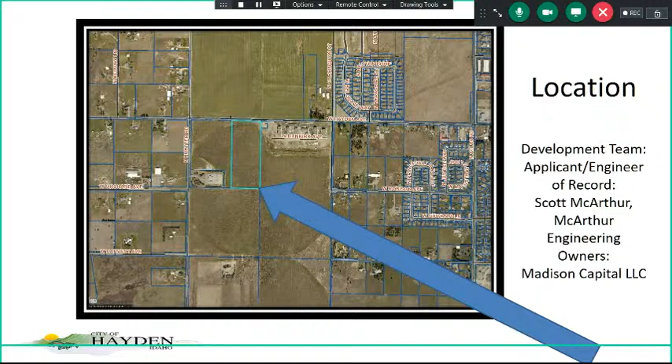The applicant and engineer of record is Scott McArthur, who's in the audience from McArthur Engineering. The owners are Madison Capital LLC, and we have Scott Kurtz, and Kiefer is on the phone. They're both here to represent their requests.

So I just want to lay a land before they take the stage. Hey, Keith Gibson has just arrived, make the record known.

Currently, the existing zoning for this location has about 300 feet south of Hayden Avenue that is zoned commercial, and the remainder of the property is zoned residential single family. The future land use map shows about 600 feet plus or minus as being mixed use, and the remainder of the property being mixed residential.

Their request is to change the commercially zoned property to mixed use, not do anything with the residential single-family zoned property. So it's a portion of what shows on the future land use map, and none of the residential is moving to anything. Just wanted to clarify that, since that question had been raised.

In your staff reviews, when we talked in the subdivision staff review, it was identified that in 2013, this property was annexed, and in that annexation there was a restriction to 4 dwelling units per acre. So if you take the 18 plus or minus acres of this project site and multiply by 4, you get 72 dwelling units.

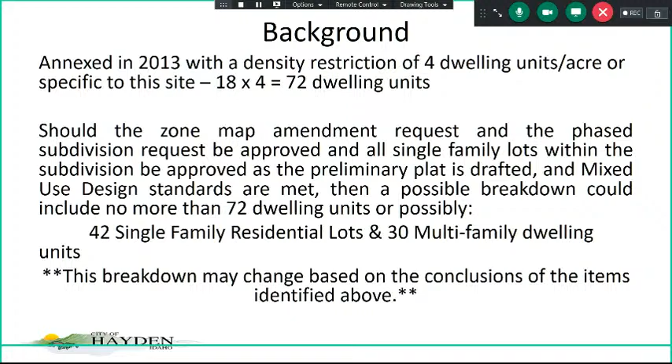no more than 72 dwelling units, or possibly 42 single-family residential lots and 30 multifamily dwelling units on that mixed-use, if it's approved, parcel. There's a lot of ifs and catches and possibles in there, but that gives you somewhat of a scenario. So that breakdown may change based on the conclusions of the items identified above. So in a perfect storm, that's kind of what could happen.

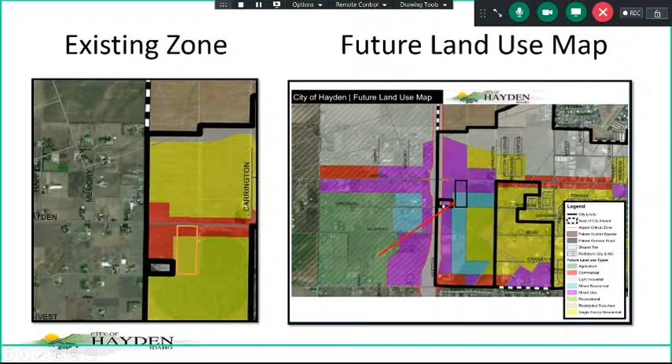So the zone map amendment, again, that's the 46 number, is a request for the commercial along Hayden Avenue to migrate toward mixed use, with the remainder of the property to remain single-family residential. In this particular instance, that mixed use is part of that geographic location that abuts Hutter in the future land use map. So as such, it would have a mixed use designation of MU2.

And as the applicant has requested for this lot to be used for both commercial and multifamily, that MU2 designation of that subcategory requires that a zoning development agreement be entered into in relationship to how that piece of property is developed. Keeping in mind that the total residential density for this whole site, this whole 18-acre piece of property, can only be 4 dwelling units per acre. Okay? Just kind of lots of pieces moving in that. Wanted to get that kind of cleared out.

And then the second public hearing piece is that subdivision that goes with Project 76. It was identified in a staff review that they're a part of or just finished up a boundary line adjustment with the property to the west. It's a phased subdivision request, and that's based on sewer basin lines predominantly. The mixed-use site is proposed to include both commercial and multifamily should the request for that zone map amendment be approved. Otherwise, it's commercial development.

And this looks like a 42-lot residential single-family phased based on the availability with that one lot to the north. And there is a comment in here about the applicant requesting sewer basin transfer. So in your application, we showed you a preliminary plat or a proposed plat. This was what was in your staff review. It shows this area kind of grayed in as being phase 2, mostly in H8 sewer basin, and this area as being phase 1.

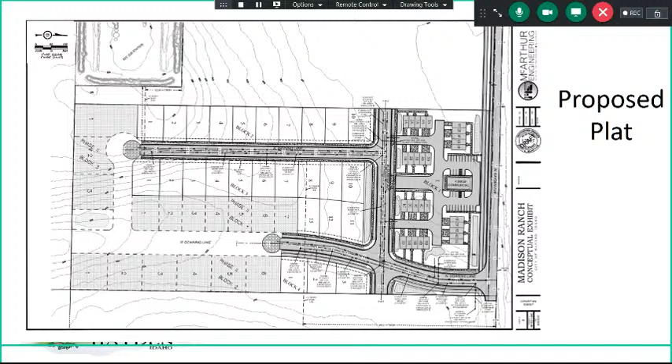This is a site plan, and it's there for pretty much conceptual purposes only to show how you could potentially meet the 10% required ground floor commercial that's required on this property, meeting those mixed-use design standards, and or how you could get some multifamily units on there. This is not a site plan review, keep that in mind, but it is conceptual to show how it could kind of lay out the land, all right? So with that, that's really the kind of general background, kind of laying the path.

I'm going to turn it over to Scott. Which one of these do you want up first? This one? Next one, no. This one? Thank you. Okay. I'm going to go sit back over there for a while. Probably take you a little while. By the way, for those of you that aren't aware, Rob Wright's our city engineer. Alan Soderling's our public works director. If you have questions, any of this I can answer.

Good evening, Commission. Scott McArthur, McArthur Engineering, P.O. Box 2488, Post Falls, Idaho 83877. Here tonight to present the Madison Ranch project. As Donna said, it's a little bit interwoven subdivision zone change. It's always hard to follow Donna, and I mean that in total sincerity because she goes through every bit of it, and she asks questions sometimes that even stump us. So that said, here we go.

As Donna stated, the project location here is east of Hutter, east of the KEC substation, south of Hayden Avenue, and west of the Viking development with the apartment complex. This is the proposed conceptual design development, just trying to meet the regulations of the city, working with staff. We've gone through several renditions. I think I surprised Rob and Alan with this one, and we've discussed how we think this best fits the needs for my client, Madison Capital, and then also for the city.

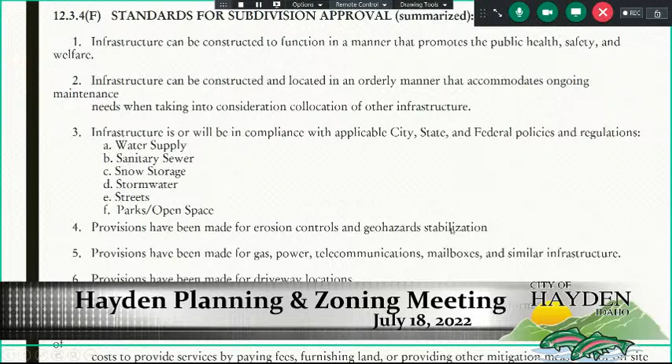Infrastructure is or will be in compliance with applicable city, state and federal policies and regulations. Again, I stated we have the water supply. Sanitary sewer, I skipped that for a reason, we'll come back to that. Snow storage, I've worked with the city, I understand the snow storage requirements and want to implement that to start. We've been down this path several times and it's hard to get that in the initial layout, so we've really been working with the city on developments to get that in up front.

Stormwater generally is taken care of through your typical roadside swales, but in this development layout we're looking to utilize stormwater tracts that'll be owned and maintained by the HOA, so it won't be a burden on the city. Typical street side swales are typically maintained by the homeowners, but in these areas we'll give up property for a reduced street section that won't have that typical street side swale that could be neglected by certain homeowners. Rather, it'll be placed in an area that you'll have routine maintenance on.

Your street sections, we are in full compliance and agreement with the city on the street sections they've examined, and the layout meets all those conditions. And then the parks and open space, there are no parks or open space slated for this area, but park fees will be collected at the time of building permits. Provisions have been made for erosion controls and geohazard stabilization. Essentially that comes through the design process through temporary erosion sediment control, and is also incorporated into the full build-out development with landscaping and protection, making sure the liabilities aren't there for the city or the homeowners.

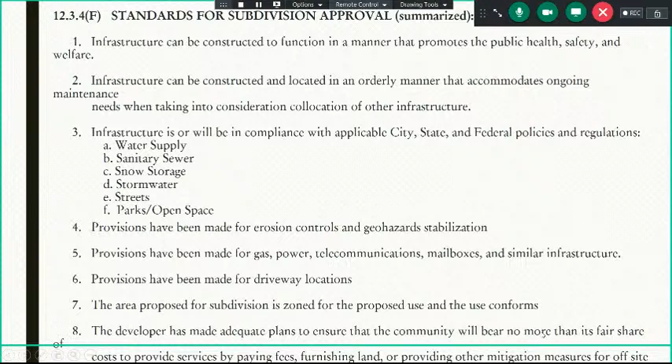And so one of our big items that we discussed a few moments ago was that we're willing to dedicate the necessary right-of-way to accommodate the improvements, but not just dealing with what's on our property, but also dealing with what's on the adjacent properties, i.e. the sanitary sewer lift station is impacting the proposed road for Downing Lane, and then also the access for Mr. McNabb's future development to the west, in that he needs sufficient access to his property, which was being provided by

the Dunkirk Avenue, which is a reduced street section in front of the Viking Apartments. We're widening that section starting at the west side of Downing Lane. So we're continuing that street section here up to Downing, and then we'll transition on the west side of Downing.

Staff recommended subdivision conditions of approval. The developer shall be required to reflect all necessary permanent dedications and or easements on the face of the plat and documents of record. Without reading that full thing, that's a general requirement by the city prior to the document being submitted to the county surveyor for review and approval. So we have no objection to that.

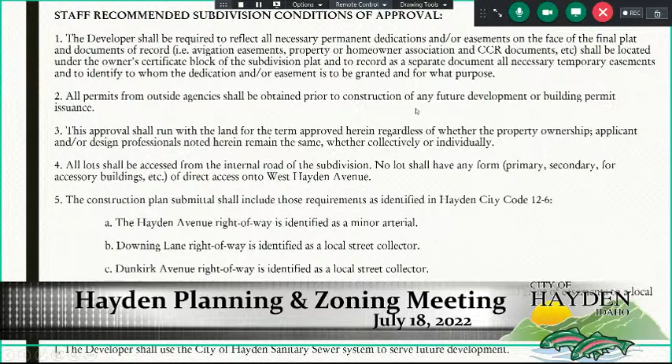All permits from outside agencies shall be obtained prior to construction. We again are required to do so prior to submittal or during the submittal process and work with the city staff on those items. The approval shall run with the land for a term approved by the conditions of approval, and we have no objection to that. All lots shall be accessed from internal roads. No lot shall have any form of access to Hayden Avenue. We agree with that condition.

The construction plan submittal shall include these requirements. Hayden Avenue right-of-way will be designed as a minor arterial. Our portion of that half-width Downing Lane will be identified as a local street collector. Again, we'll design our street sections in accordance with what is required. Dunkirk Avenue right-of-way is identified as a local street collector. So Downing and Dunkirk will essentially have the same improvement section. And then any internal road network will meet the requirements of the city of Hayden.

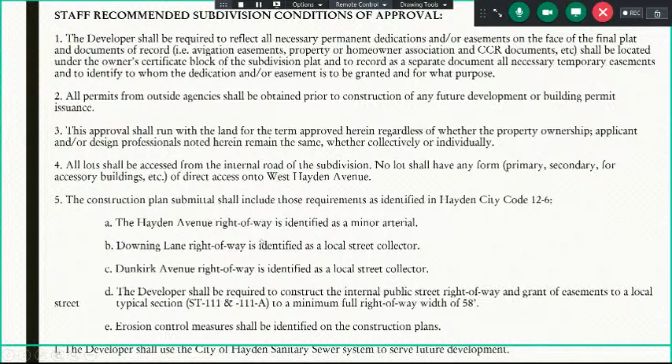Erosion control measures will be in place. On our plans, we provide a specific plan that can be extracted from the plan set and utilized specifically for erosion control. We feel that helps the contractors in the field maintain those improvements. A letter from the USPS with respect to mailbox locations will be obtained. Again, after we get through a point where we can receive approval, we will seek that letter from the USPS and submit that prior to construction plan approval.

Landscape plans will be provided. A note shall be included on the landscape plans to identify the dry grass mix, which shall be applied until individual lots are constructed. Basically, we want to be in full compliance. That area out there does see blowing dust, and we've all witnessed what can happen in that area during farming activities. And so all that erosion control will be taken care of with temporary seeding as needed. The swales that are being proposed in the project should be owned by the homeowners association. We agree with that. We'll construct those swales and then form the homeowners association.

Street frontage improvements along the streets shall be included with the landscape. The design, it's always difficult, and we work really well with the city. It's always difficult to have a large amount of future right-of-way trees placed with no irrigation. And so unless the lots have irrigation, we can work with the city on how that is implemented through time. But basically we want to make sure when we get this approval that it's understood that those street trees in front of those lots without irrigation are just being placed without, and I know the city's really good at working with that, the staff.

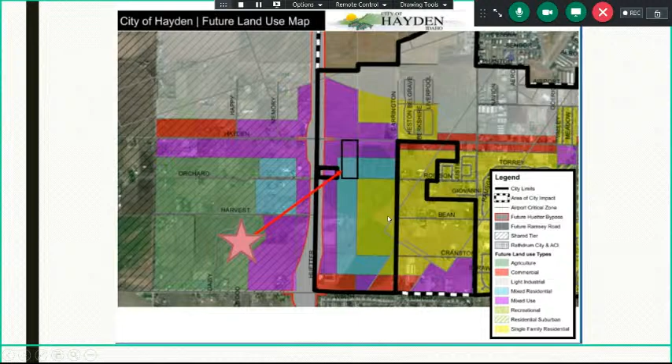Amendments to the zoning map and/or zone text shall be in accordance with future land use maps. Again, the future land use map identifies the area in question as being mixed use, and the staff has deemed that MU2.

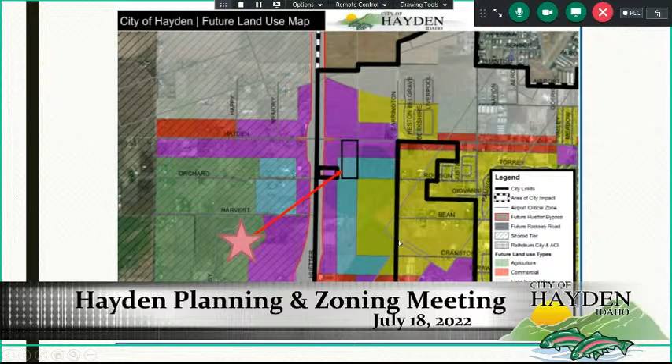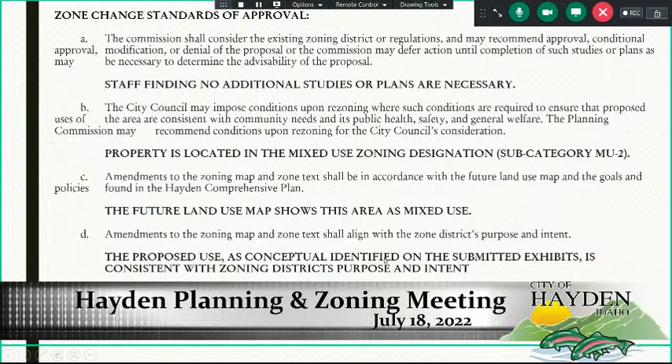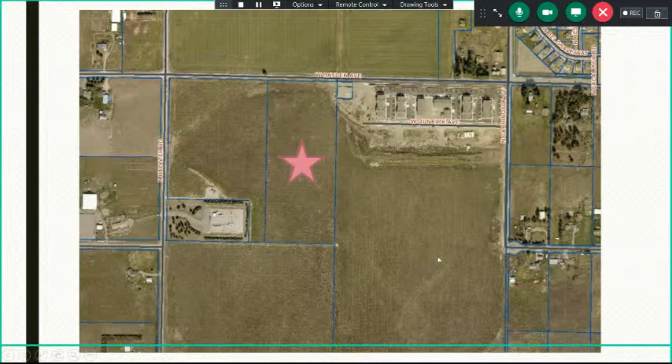Amendments to the zone map and zone text shall align with the zoning district's purpose and intent. The proposed use, as conceptually identified on the submitted exhibits, is consistent with the zoning district's purpose and intent. That's why we submitted that conceptual layout for you, not to make you dizzy, just to show the feasibility of the proposed 30 condo single-family units and the commercial facility, more of a central hub, meeting setback requirements and open space requirements.

Yet still meeting the requirement for common walls—I believe fourplex is the minimum for that, Donna. So we are proposing fiveplexes with common wall structures, essentially conditionally and conceptually showing what could happen on the property.

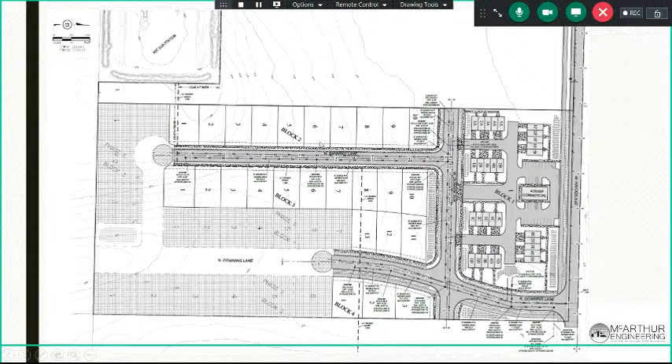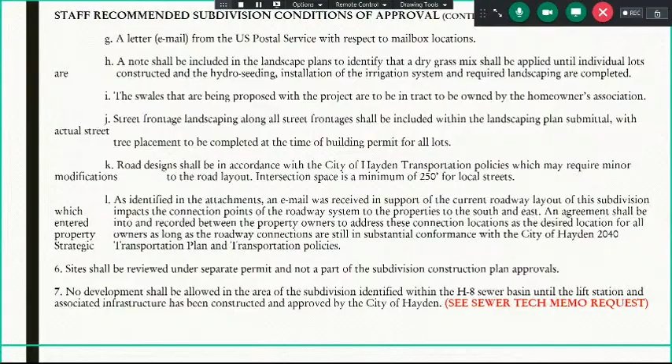With that said, I want to hand this over to my client, Mr. Scott Kurtz, to let him discuss their request regarding sanitary sewer for this property. Did you want to open his presentation?

Good, yeah, there you go. Yeah, you did, no help from me. How do we do it? I think you just scroll. How does it scroll? Yeah, just scroll, okay, great.

Thank you, Donna. Thank you, Scott. I'm going to try not to make myself triple redundant, but it's kind of difficult when you go last. I wanted to thank the City of Hayden and Planning and Zoning for the opportunity to present this project. It's been a long time in the making. We've been working with Donna and some of the crew for the past year. I think we bought this parcel in July of 2021.

I haven't met all of you, so maybe this is an opportunity to introduce myself, my company, and the team. My name is Scott Kurtz. My company is Madison Capital, a developer company. I have my partner, Kiefer Norris, who's joined by Zoom—he couldn't join us in person. We've been working together on various projects for, I'd say, the past 13 years.

We're a relatively small developer. You can see from this project, it's humble, 72 units. We're all locally based—my wife and I, my business, my family are all here in Coeur d'Alene. As a matter of fact, the whole team, soup to nuts, is local talent. You all know Scott McArthur probably too well, but our horizontal developers are Peck and Peck, our builders are LH Homes, a multi-generational father-son building team.

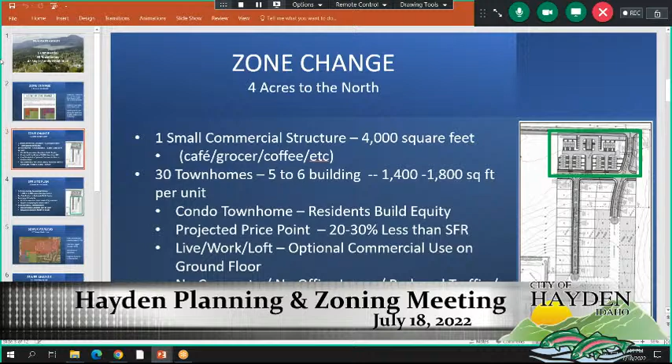In terms of affordability, our projected price point on this—just because of the efficiencies of building townhomes versus single family and the lack of land—we think it's going to be 20 to 30% less than a comparably sized single family home.

There's obviously no guarantee, especially in this market, what pricing is ultimately going to be down the road, but I would expect this product will be sub $500,000. And that's a rare creature around here. I think it gives an opportunity for that starter family to kind of put their foot down within the area. One of the other things we're really excited about, I don't think this product exists.

We're going to build it with this live, work, loft concept. So you have on the ground floor the option to use it as commercial space. If you're a private contractor, a single member LLC, say a tax person, an accountant, a designer, you've got a business where you need some isolation and a professional place to work, not the small bedroom at the end of the hall upstairs where you can't get anything done. You can optionally use that for commercial space. It also gives you the opportunity, because there's two entrances, one on one side for potential clients, you can even put a plaque up and have signage. On the other side with the garage is where the family enters in.

So you could have a small business, operate from home, and have clients over. You could have meetings, presentations, pitches. If you work in an industry where you deal with a lot of personal information, you can have a client come in and feel comfortable that they're in a sort of controlled office environment, but it's right on your ground floor. The benefits to this, I think, are great.

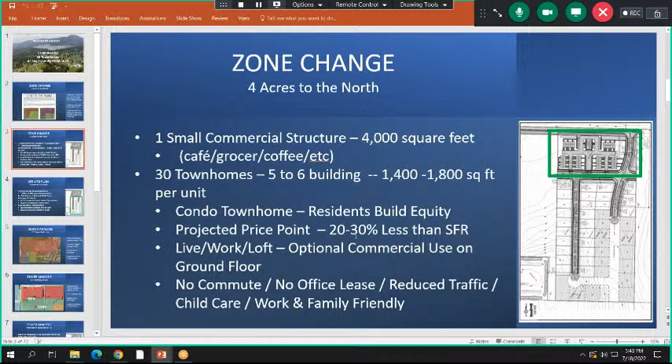For the end buyer, you buy in an affordable place, you don't have to commute. You're reducing your traffic flow. You don't have to say, I'm going to work, I've got to drive 30 minutes to Spokane to my office, and you don't have to pay for an office lease as well as a mortgage. It's sort of all in one. It reduces the need for childcare if you've got a small family, you've got one kid, and you can be on site in case of an emergency. So there's just a lot of aspects to this that we're really excited about and like. We think it's work, family, and community friendly.

So that's, I probably went into too much detail since we're not going into the site plan. It's just a zone change, but that's what the vision is. We thought we'd kind of share that up front because we like it.

If I can go into the single family, and here I don't want to be too redundant because we've gone over it, but you're looking at 42 single family residential homes in the green space over here, 1,800 to 2,600 square feet per home. We can be flexible as we see this market unfold as to how large we want to build, and again, trying to control for affordability, but that's the range of the product. Obviously going to be a for sale product, so again, residents and buyers can build equity. We think it will be relatively affordable.

We're going to meet the, I think it's 8,250 square foot minimum. So it meets the city standard, but it's not a single family residence where you're paying for excessive amounts of land. We were looking at a project in Rathdrum that was 0.4 acres per lot. You have to pass down that lot premium to a buyer. That buyer has to finance it, and now they're financing at 5.5% instead of 3%. The math doesn't really go so well. So we think this works really well, even in this environment. Scott already addressed all the buildings, the roads and infrastructure we're doing, so I won't get into that.

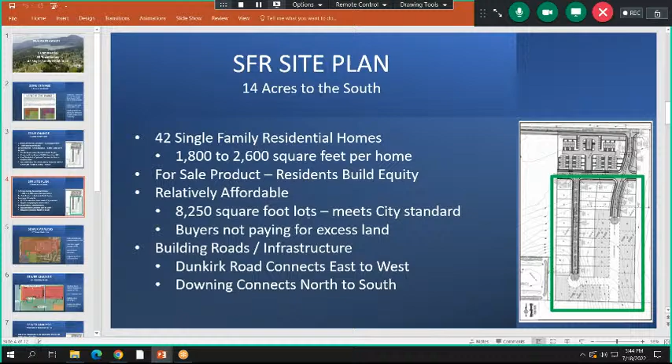The sort of challenge that we have, and again, I appreciate the city's concerns and need for boundaries and delineations and sewer basins, got to begin and end somewhere. But the challenge we have is this H7 versus H8 sewer line. I think we're in a position where we're relatively unique in a number of ways, and one of them is we're the only undeveloped piece of land that has the H7 and H8 kind of cutting through us. Everything else has already been, in some way or form, developed. So we're the only undeveloped land. This is our little green area here, and this red is the H7. The other thing that's presenting a real challenge for us, and we just want to come to the city and see how we can figure something out, because it's an engineering cost and delay challenge.

The line doesn't just run straight through like on the commercial, where that was H7 and on bottom it was H8, which would make more sense. Instead, it comes in the side, goes about halfway through, starts going down to the south, and then juts over again.

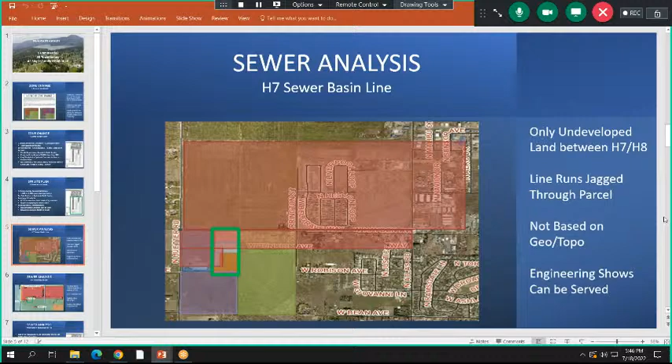So we have these two Jenga pieces of land we're trying to serve. As Scott and Donna know, trying to put a site map around that is challenging, to put it mildly. I think engineering tells us the H7 can serve that entire parcel. There's no geographic or topographic barrier that can't be overcome, so it's something that can be done.

Just from a practical standpoint, our proximity to the H7 implies that's the logical place to hook up. This is a rough green outline of our property. Here's the H7, which we're directly adjacent to the northeast, whereas the H8, yet to be built, is much farther out there to the south.

It raises a lot of cost considerations for us. Costs generally get passed down to the buyer. If you're trying to build affordable product, the more costs you have up front, the more difficult it is to deliver on the back end.

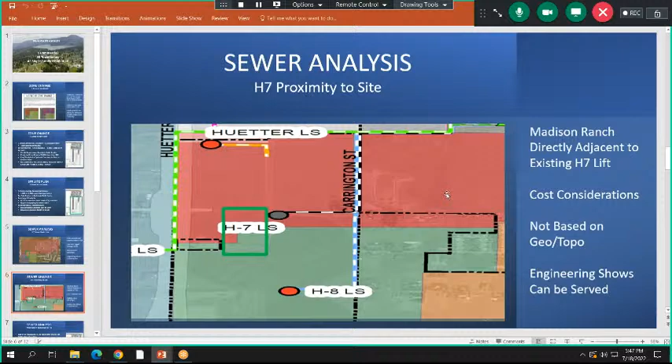If we were building 1,000 units and 150 of them fell outside of H7 and into H8, that's a large number—I wouldn't even think to come to council and planning and zoning to ask for consideration. What we're looking at is a pretty minimal number.

We've got 42 proposed single family units; 26 of them fall within the H7 lift station boundary line, and it's just 16 that technically fall within the H8 basin, as shown before, outlined here in green and gray.

One of the challenges we've talked to Scott about—it seems unusual, I've never seen it done before—is that we're building this infrastructure, Downing Lane running north-south, and we'd have to stub out the lift here, carrying south to north to this H7 station, which is right there, you could throw a rock and hit it. Then you'd have to have a completely separate lift running north to south to H8, which is way off down on the corner of the wall over there.

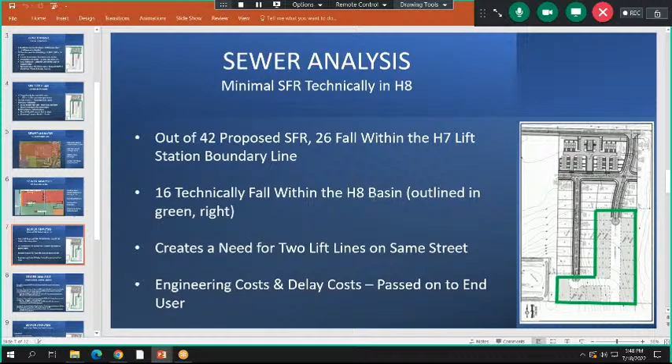It presents a lot of challenges and a lot of delays. It's just something we're trying to overcome, and we want to have the conversation to see if we can work with the city on this.

So those are our concerns. We spent a lot of time, though, reviewing and doing our own analysis of the master sewer plan and the current and future land use, to see how the city could view this—particularly whether we're asking for more capacity and allocation than we deserve. We've concluded that even with the inclusion of the 16 single-family residential units, this Madison Ranch plan leaves sewer capacity unutilized.

We went through a couple of scenarios. Scenario one goes for the most usage, the most density, under future land use, while scenario three is our actual proposal. In scenario one, the mixed use could go 600 feet south of Hayden—which we're not asking for—and the remainder of the parcel could be mixed residential. In that scenario, total allocation of single-family residential units would be 122 units within H7. Our proposed development is 72 units, so that's only 59% of that hypothetical extreme-density allocation.

I'll skip scenario two, but the more relevant one is what we're actually requesting, scenario three. We keep it at 300 feet, change it to mixed-use commercial off of Hayden Avenue, and leave the balance as single-family residential, all low density, less than 4 units per acre. Under that scenario, our calculation of total allocated single-family units within H7 is 75 units, and if we include the 16 units that fall in H8, we're only at 72 units—still only 95% of that allocation.

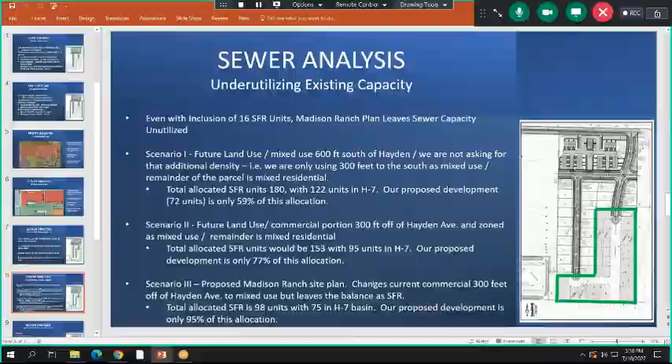So our conclusion is we're not asking to put any additional burden on the H7 station. It's just trying to relieve the mess, the nightmare, the cost, and the delay of building out these lift stations if it's unnecessary.

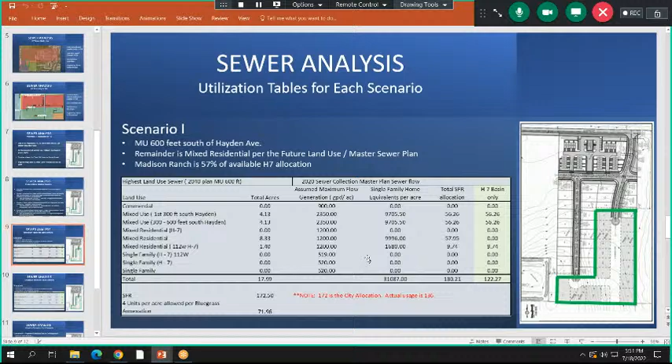We have a couple of tables. One of the things we noted is the calculations we're using are based on 172 gallons, which is the city allocation. And we'd seen that actual city usage is only 136. So again, we're kind of under the allocation in terms of 75 versus 72. And if you look at actual usage, there's not an excessive burden on H7. It actually gives the city an opportunity to lock into a low density, low usage site plan.

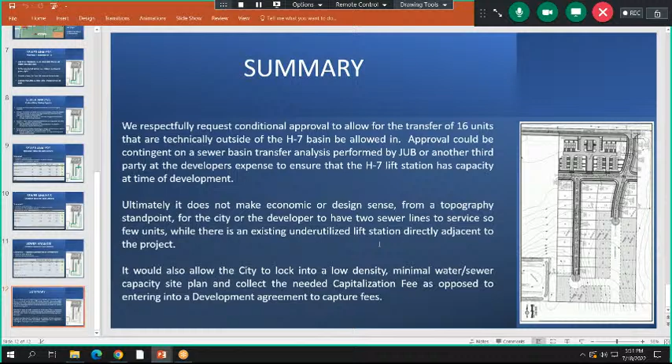So again, we fully appreciate and respect the concerns of the city. We want to address them, we're trying our best to analyze them. This is our first build in Hayden, so part of this is getting an understanding and trying to be a good partner and understand what the city's concerns are. But we think we have a good case given our low density, underutilization of capacity, proximity to H7, the engineering and cost aspects, and the fact that we're the only underdeveloped lot with a unique boundary line. I don't think we're setting precedent. I think we're just trying to take a common sense approach and understand what, if anything, we could do to move this forward. So I thank you for your time and look forward to questions.

Do any of the commissioners have questions for the presenters today?

Keith, I have one real quick. Sean, you said this is the only undeveloped lot or parcel within the H7 sewer boundaries? It's shared, it's been developed, so we kind of know the use, is that correct? I think what he said is it's the only undeveloped lot that has a split between H7 and H8. Technically the Viking has a split too, but they've developed. And the rest are either not split or developed in some way.

There's a large density in this area with the apartments on their parcel. And this property, that wasn't the intent of Madison, to come in and try to mimic that development along Hayden Avenue. We know that's not what the city wants. No, and so that's why we're trying to stay in that same understanding. But this property right here, owned by Mr. McNabb, is entirely in the H7 station under commercial zoning, so he has no concerns. But this property, essentially right in this area, follows the line and then traverses straight across.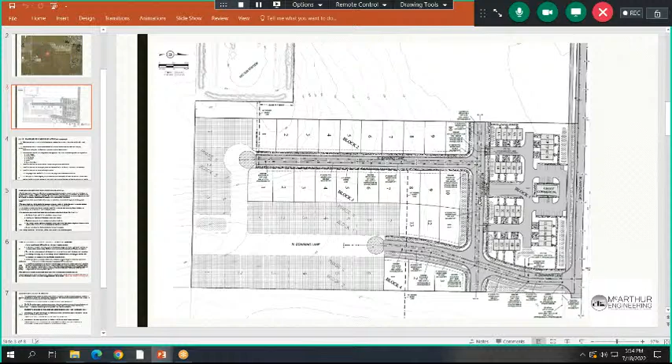No additional questions? But this is conceptual, it could change. Correct, yeah, this is just to get the idea. Really, the design was based around that line, the separation line of H7. This is the H7 line to the north and to the west of this line. So all the lots in white would fall in that H7 basin, and the grayed out lots here would be a future phase.

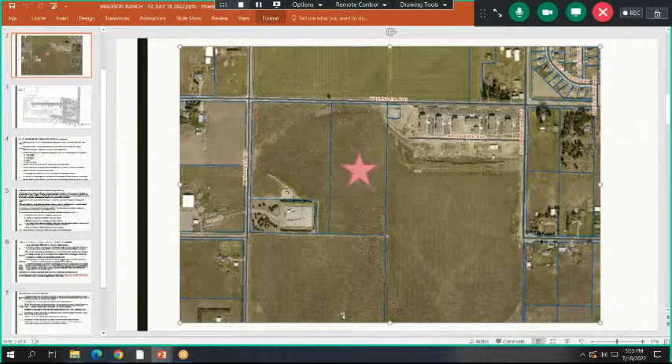If a sewer tech memo is not approved as part of our request, these lots would fall in the H8 basin, which unfortunately, as Scott mentioned, here's the H7 lift station. The H8 is further south here, and they would have to wait to develop those 16 lots until Viking built phase after phase, extending that infrastructure up. So our clients would build a portion of this road and wouldn't be able to provide access because they wouldn't have the sewer infrastructure in that road to someday connect to this property to the south. So we're kind of at a traffic jam right now with streets and sewer.

Any other questions, Keith? All right, thanks, Scott. Okay, thank you.

Okay, it's way too quiet in here.

So, if there were public here, I would talk to them, but at a public hearing, we give out flow charts that kind of give the process for a public hearing. And on the back side of those flow charts are the standards of approval. So if everybody could pull theirs out and look at the standards of approval for zone map amendment, we're gonna go through those in summary, because Scott did a really good job reading them to you, so I'm not going to do that again, but we'll just kind of summarize the staff review and noticing.

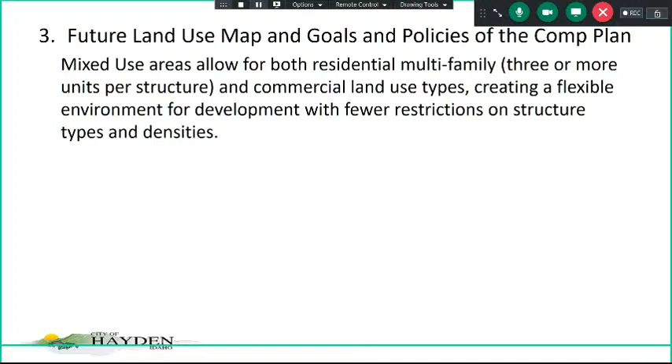The third requirement talks about the future land use map, goals and policies of the comp plan. The mixed use area allows for both that residential multifamily of 3 or more structures or units per structure based on the comprehensive plan definition, as well as commercial land use types, wanting to create that, again, that flexible environment for development with fewer restrictions on structure and types and densities.

In your staff review, on page 5 of your staff review, and then in the appendix of the zone map amendment, page 5 kind of pulled out those that applied to this, going from a commercial only use to a residential multifamily use, the goals and policies that address those. And then all of the goals and policies that are in the comprehensive plan are found in the back of your staff review. Some people might have a different goal or policy that they think fits more appropriately than the ones that I pulled, not infallible.

But ones that pretty much follow the process are that you want to provide a balance of commercial uses in designated areas throughout the community centered around established transportation corridors while protecting the character of adjacent land uses. Hayden Avenue is an established transportation corridor. It's been there for a long time. Want to ensure that ordinances and policies don't violate private property rights or adversely impact property values or create unnecessary limitations on land uses. Want to promote and encourage the development and rehabilitation of quality housing through a variety of housing options and densities.

Encourage rezoning and zone text amendments to support the creation of strategic nodes or higher density development and transition zones between residential and industrial uses. And although these aren't all industrial, there are commercial uses that fall in that category a bit. And development should be compatible with the land use chapter of the comprehensive plan and fiscally responsible in supplying adequate transportation, utilities, and parks to newly developed areas. And that's a snapshot of many of those goals and policies that were listed on page 5.

So the mixed use zone provides for both residential multifamily of 4 units or more per structure and commercial land use types, creating that flexible environment for either one or the other or both. So commercial in the mixed use is only a subset of the commercial that's allowed in commercial.

Setbacks and lot coverage, the table is shown on page 7 of your staff review. Everything is the same as far as all the setbacks, lot coverages, not able to have an accessory dwelling unit. All of those are the same except for a couple of cases where the mixed use is only multifamily, which is not the case here because this is both commercial and multifamily. But if you had mixed use where it's only allowed to be multifamily, then the rear yard setbacks, let's see, except the lot coverage maximum. That's what I was going to talk about.

Lot coverage maximum. So commercial doesn't have a lot coverage maximum. Commercial only in the mixed use doesn't have a lot coverage maximum. Commercial and multifamily together don't have a lot coverage maximum. But if you only have multifamily on that lot, then you can only have 70% of the lot covered with structures. Those are carports, garages, buildings. In this case, the request is for commercial and multifamily, so that lot coverage doesn't hit, but that is a quirk. Rear yard setbacks do apply.

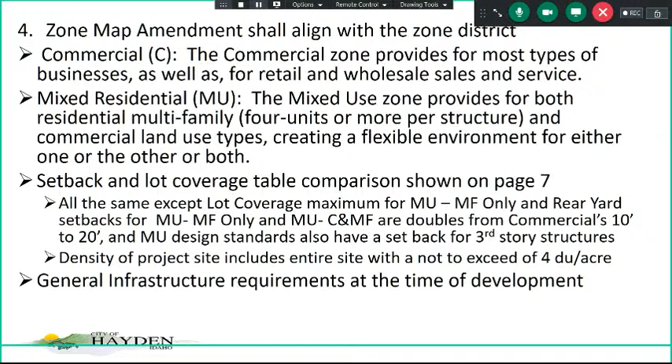So notices were sent to 22 agencies, and we did a double notice, so they got to see both the zone map amendment request and the subdivision request, so they could see how they work together. We had the same in some cases and different in other cases. The Coeur d'Alene Airport had no comments, but they requested a navigation easement. Waste Management had no objections, and they provided container enclosure specifications to consider at the time of development. DEQ provided general comments that could be applied at the time of a specific project.

HARSB had no comments. Hayden Lake Irrigation District said that the project had their full support of both the proposed amendments here as well as the subdivision. And Northern Lakes Fire Protection District had comments related to the project's future at the time of development. And all of those comments were in your staff review.

So should you choose to approve the zone map amendment from commercial to mixed use, you also need to look at what you may want to include in the zoning development agreement, what you want it to address. So these are truly suggestions. The concern is that the site plan is conceptual. It's exceedingly conceptual. And partially because you have to figure out how this all works together, number one. And number two,

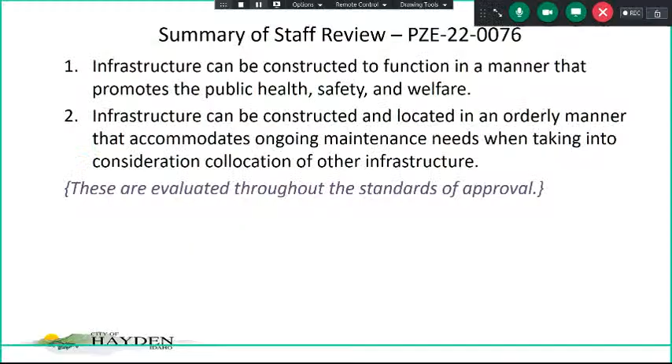So working through those standards of approval, the first two are related to how it's constructed to promote public health, safety, and welfare. The second one talks about construction and location in an orderly manner that accommodates ongoing maintenance needs and co-location of other infrastructure. And that's pretty much addressed in number 3 in those standards of approval. So the infrastructure is or will be in compliance with applicable city, state, and federal policies and regulations. We have will-serve letters from Hayden Lake Irrigation District on June 30th and from the city of Hayden on May 18th. Northern Lakes Fire Protection District provided comments for construction on May 19th.

The project site is split in the sewer master plan between the H7 sewer basin and the H8 sewer basin. And as the applicant said, we've been back and forth with them for a while about the H7, H8 conversation, and they did request a possibility to have a sewer tech memo put together to evaluate migrating those lots in the H8 basin into the H7 basin. Staff had identified that the sewer master plan was put together for reasons, and staff evaluated it and decided that it didn't make sense for the city to migrate those lots into the H7 basin. Hence the condition that those properties in the H8 basin could not develop until the H8 basin was constructed and that infrastructure was put in place.

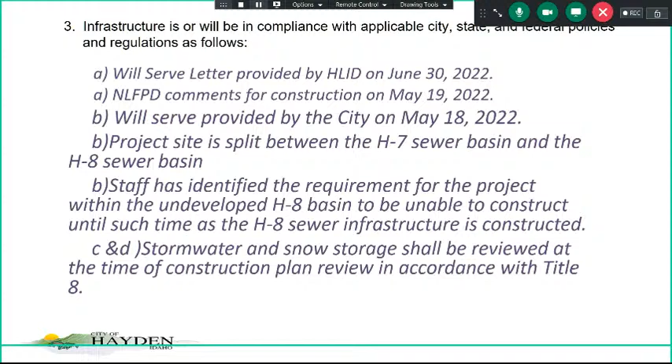Should I continue? All right, so stormwater - Scott identified stormwater tracts as joint stormwater tracts, and snow storage shall be reviewed at the time of construction plan review in accordance with Title 8. Street names and addressing shall be reviewed by the city at the time of final plat. The city has a policy that doesn't allow any duplication of street names with any other street name in Kootenai County.

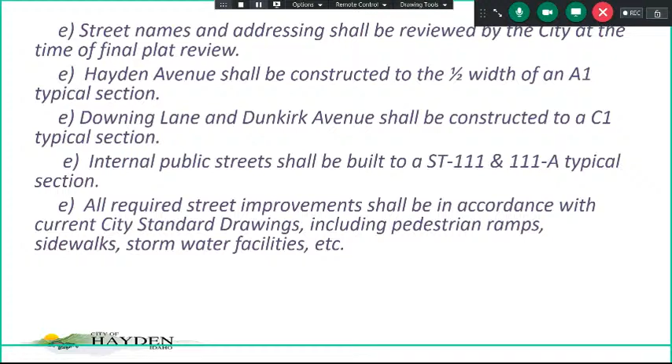Most of that is because of our emergency responders - we share borders, we share responders that respond to multiple jurisdictions, and we like people to be saved as much as possible. Hayden Avenue shall be constructed - the half width on the south side shall be constructed to the half width of an A1 typical section. Downing Lane and Dunkirk Avenue shall be constructed to a C1 typical section.

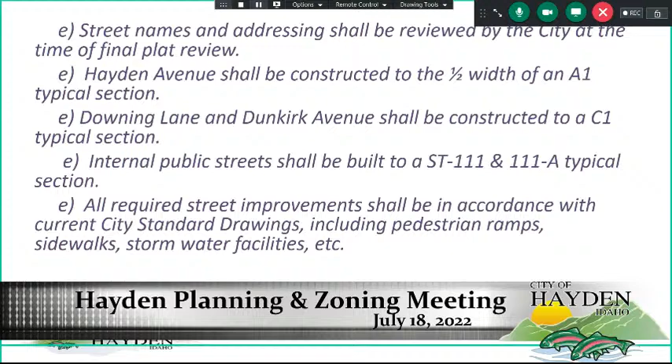Internal public streets shall be built to the ST111 and 111A typical section. It's important to note that all required street improvements also shall be built to the current city standard drawings, and those include pedestrian ramps, sidewalks, stormwater facilities, etc. So it's more than just the pavement.

Geohazards, as Scott noted, shall be reviewed during construction plan review, because although the prairie looks flat, it is not. No parcels shall have access, primary or secondary, to Hayden Avenue. Mailbox locations shall be located on internal public streets. Sometimes they require turnouts, so turnout easements and pullouts should be part of what the construction plans will be reviewed for.

Number 7 talks about zoning and whether it is appropriate to the zoning designation. R1 is a zone established to protect stable neighborhoods of single-family dwellings on smaller lots, and commercial is for most types of businesses with retail and wholesale sales and service. The proposed zone is for both residential, multifamily, and commercial land use types, creating a flexible environment for either one or both.

The setback tables are on pages 7 and 8 of your staff reviews. And I sound like I'm echoing really badly - I can't quite figure out where to move. So these are those setback tables we've kind of talked about back and forth. These are the residential setbacks for primary structures and accessory structures.

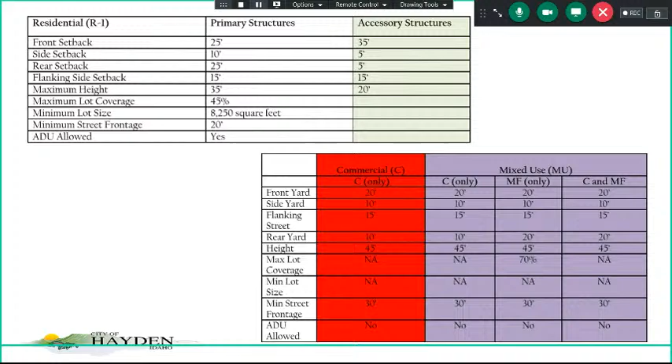Minimum street frontage of the original lot is 30 feet. You've got that whole stretch across Hayden Avenue that meets that minimum street frontage requirement, and ADUs are not allowed in mixed use nor in commercial.

Before you go off of that table, when it's the 45 foot, I understand that when it's abutting like a 1-story house or even a 2-story house, but where this is, the 3 stories are all separated, does that become a non-issue? Mm-hmm. Okay. If they had—yeah, it does in this case. Okay, thank you. Yep.

So your goals and policies of the comprehensive plan are on page 10 of your staff review. A recap of those: encourage development within the city prior to the area to be annexed, maintain a balanced mix of land uses, densities, and housing types, promote greater choices and opportunities, establish a balance between jobs and housing to attract new employment and living opportunities. Coordinate timely development of efficient, effective, and environmentally sound sewer, water, and other utility infrastructure servicing the community, assuring that costs of development are shared equitably and accommodate for ongoing growth. Also encourage small-scale retail activity, restaurants and other service businesses, as well as attract a live, work, play lifestyle through a mixture of commercial and residential uses.

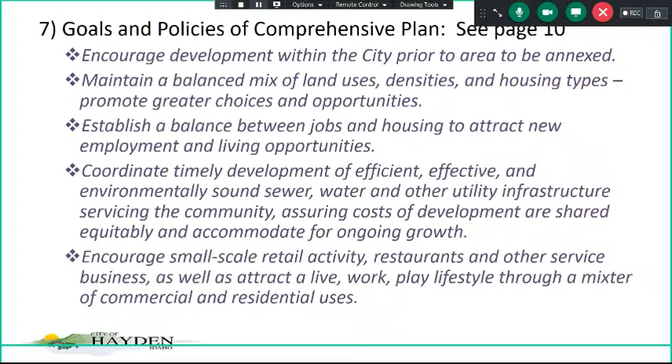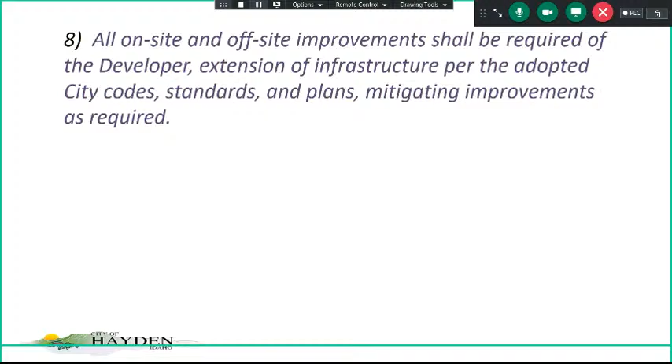The 8th standard talks about not bearing any more than their fair share of the costs. All on-site and off-site improvements shall be required of the developer, extension of infrastructure per the adopted city code standards and plans, and mitigating improvements as required.

We sent those to 22 agencies. The Coeur d'Alene Airport responded with no comment, but requested the avigation easement. Waste Management provided comments for container enclosures. DEQ responded with general comments—about a 4 to 6 page letter, a lot of stuff in there. Hayden Area Regional Sewer Board responded with no comments or objections. Hayden Lake Irrigation responded with full support. Northern Lakes Fire Protection District responded with comments regarding requirements at the time of construction. Idaho Department of Lands responded with no comments. Fish and Game had recommendations related to the open space areas for planting of native vegetation, both for pollinators and for birds. And the Kootenai County Community Development Department responded with no comments.

I did have one public comment that I apologize for not getting attached to the memo that went out, but I think you guys all got tonight, from Tom McNabb. He said that this project would be great for the area and would support the development of our property in the immediate west along Hayden and Hutter. Beyond that, we received no additional public comments.

The staff recommended conditions of approval, I believe, start on page 12 of your staff review. They're summarized here: dedications and easements on the plat, joint stormwater requirement, easements, maintenance, et cetera. All of that should show up on the face of the plat.

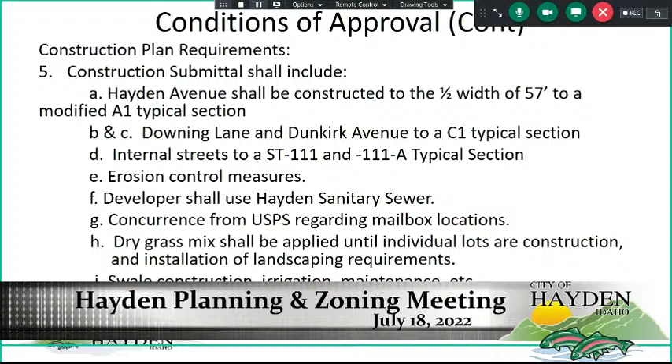Construction plan submittals need to include typical sections for Hayden Avenue, Downing, Dunkirk, and the internal streets, plus those erosion control measures we talked about. It's a requirement of the developer to use Hayden sanitary sewer. Concurrence from the U.S. Postal Service is needed regarding mailbox locations, because sometimes they think they should go someplace and we'd say, it doesn't work so well.

Dry grass mix shall be applied until individual lots are constructed and installation of landscaping requirements are met, especially out on the prairie. They dry out really fast and you get a lot of dust blowing, and that makes nobody happy, including the airport sometimes.

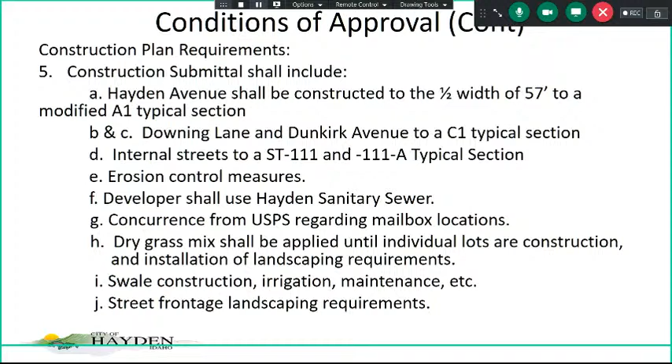Swale construction, irrigation, and maintenance. Swales that are joint swales, part of the whole subdivision, are constructed as part of the subdivision construction and inspections. Those have to be built at that point, irrigated with the grass actually working. Whereas swale construction in front of individual lots happens at the time of building permit, and those trees are planted at the time of building permit because we kind of like to have them irrigated by the homeowner and have them survive.

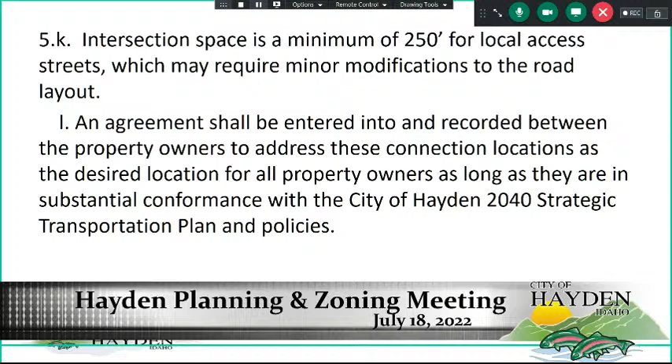Intersection spacing is a minimum of 250 feet for local access streets, so there might be some minor modifications to the road layout, and we would consider those minor in nature and wouldn't come back for reapproval. An agreement shall be entered into and recorded between the property owners to address those road connections, as long as they're in substantial conformance with the 2040 strategic transportation plan and adopted policies.

I don't know why that says sanitary sewer oversizing mitigation, but I think it's left over from a previous PowerPoint. I was madly working on it this afternoon, so I apologize for that.

The site to the north, that commercial or mixed-use site, shall be reviewed under a separate permit and not as part of the subdivision construction plan approvals. Sometimes when subdivisions have parks in them, we review the park plan at the same time as the subdivision, because they're building the park at the same time. In this case, it's a completely separate animal.

And no development shall be allowed in the area of the subdivision identified within the H8 sewer basin until the lift station and associated infrastructure has been constructed and approved by the City of Hayden.

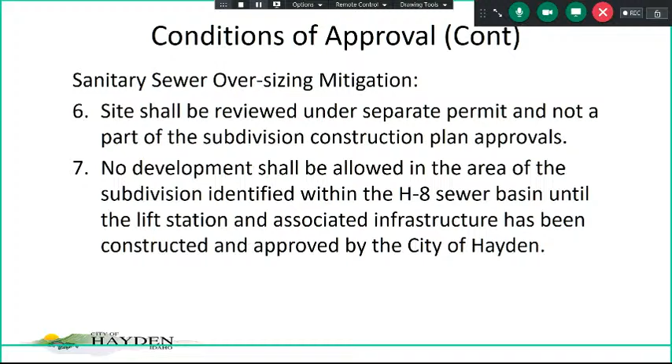So that just leads me to the two decisions, and I'm just going to roll those around, and then you can move to the public comment period. I don't know if there's anybody on the phone that may want to participate with that.

The Planning and Zoning Commission has findings and recommendations related to the zone map amendment. You can recommend approval with conditions or denial of the zone map amendment. You can't just recommend approval because this is a zone map request to mixed use, in a mixed use 2 area, and their request for multifamily requires a condition. So there has to be an approval with conditions if you're going to approve it, or a denial. If the Planning and Zoning Commission recommends approval with conditions, the commission can include those conditions in that zoning development agreement.

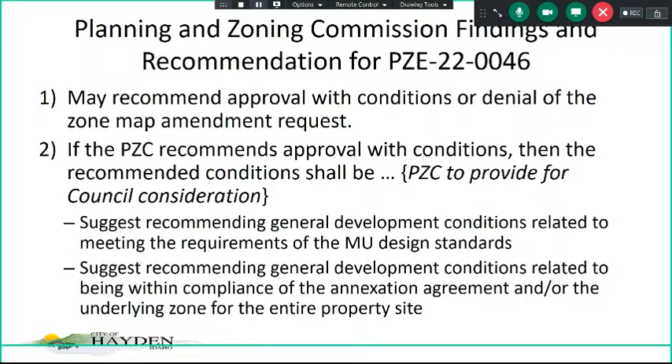The second finding is completely separate. You do the first one first because you can't get to the subdivision until you've got the first one figured out. Then for the subdivision, the Planning and Zoning Commission may recommend approval with the staff recommended conditions as they stand, or approval with conditions where you amend those conditions on page 12 of your staff review. You can add another condition, delete conditions, or modify the existing conditions.

You could choose to deny the request for a preliminary plat, or you could choose to table the request for further information or study, like a tech memo or whatever that is. So those are your two choices. You've got to figure out a path forward.

Fonda, do you have, is that okay? Yeah, so I stand for questions. We all do. Kind of a staff review conversation.

Question: refresh me, MU1 can only be developed if the bypass goes in, MU2 can be developed now? No, MU2 can be developed with commercial outright under mixed use; it's limited to commercial. If you want to do multifamily on that piece, you have to do it under a planned unit development, which they're not proposing, or under a zoning development agreement at the time of the zone map request. They're requesting it under a zoning development agreement.

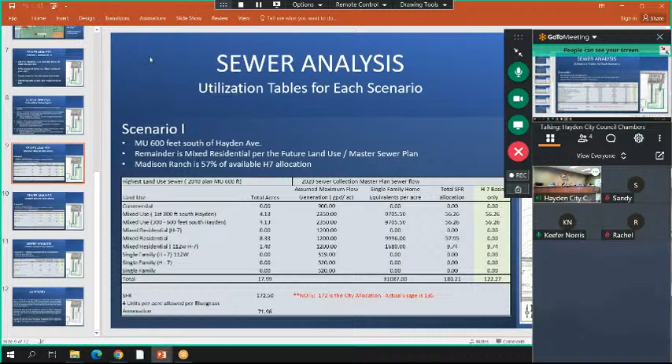Can you hit slide 11 for me real quick? Say it again? Could you move to slide 11 for me? Oh yeah, thank you. Okay, anything else to present? I believe that's it, unless you guys have additional questions.

I have a couple questions. When you purchased the property, you knew it had split lift station zoning, correct? The line was, and from my professional opinion, the line was in a different location. I wasn't quite sure where the line was. We knew that it had a split zoning. We were under the impression we could ask for the sewer tech memo. In speaking with staff, I mean, I trust what they're saying, and okay, so we move forward with the request for a sewer tech memo, and then this discussion came up.

Topographically, we analyzed the property before they purchased, and we felt confident moving forward that it would function well within the city regulations and guidelines, and we provided an example of how that might look, knowing that we would be the end of the line, and then we were denied that request.

Before we purchased the property, we did have a pre-development meeting, and we discussed this item. The conversation was that we would be able to do a transfer analysis study to determine if it made sense. We have that in our pre-development meeting notes that a transfer analysis study would have to be completed, and that's where we're coming up with this. We're not pulling this out of thin air, that a review would be completed.

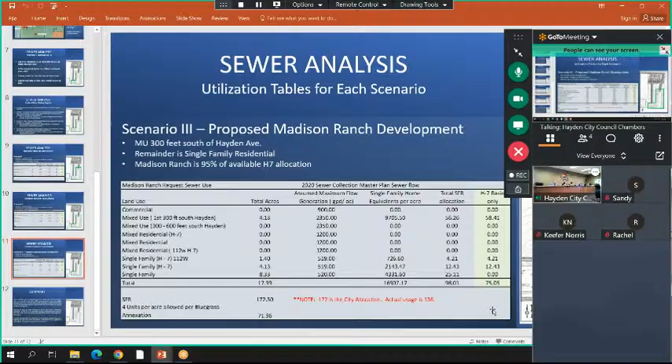Thank you. Any other questions? Okay, so thank you. I guess we need to move on with deliberations, recommendations, and a decision. Do the commissioners wish to deliberate this, or delay deliberations and decision-making?

Go forward? Yeah, let's go forward. All right, so we're going to deliberate. Brandon, you've got the remote, so why don't you go first, buddy?

Can you do the zone map amendment first? Yeah, oh yes, I apologize. We are deciding two different things. So to the question of deliberation, I was speaking to PZE 22-0046, which is the zone map amendment. So with that in mind, Brandon, do you want to give us your thoughts on PZE 22-0046?

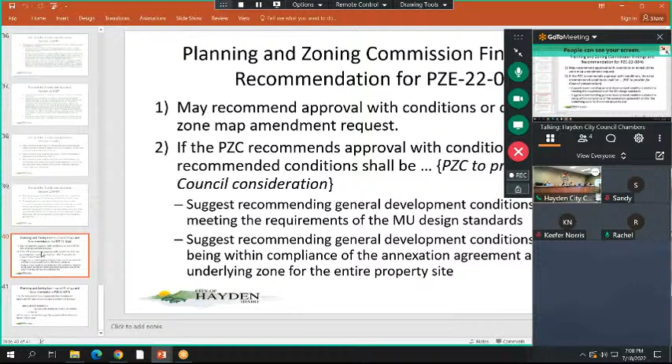Thank you, Fonda. You're welcome. My thoughts currently, I want to listen a little more to your guys' deliberation. A lot of what the last speaker spoke to, I think Scott MacArthur, I could barely hear him. Everything that I've got is based off of what I've read and listening to Fonda. So you guys go for it, and I'm going to listen for a little bit.

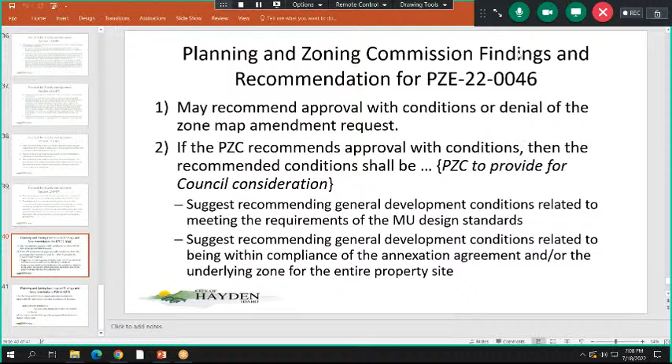Those standards of approval are on the back of the flow chart for the zone map amendment, and that's what you're going to need to gear your findings toward. That's also the portion where we talked about the potential for a zoning development agreement that would include a condition to meet the requirements of the mixed-use design standards, which would accomplish the calculations for the 10% on the commercial, as well as deal with the parking, and that they comply with the density requirements of the annexation agreement. So those were the two conditions that had been discussed before.

You want to think about it? Do you feel that it meets the standards of approval for the zone map amendment? Yeah, I don't have any objections to it. Okay, and any thoughts on these - I believe there was one staff condition of approval. Any thoughts on that? Which was that it included a... zoning development agreement? Thank you, zoning development agreement.